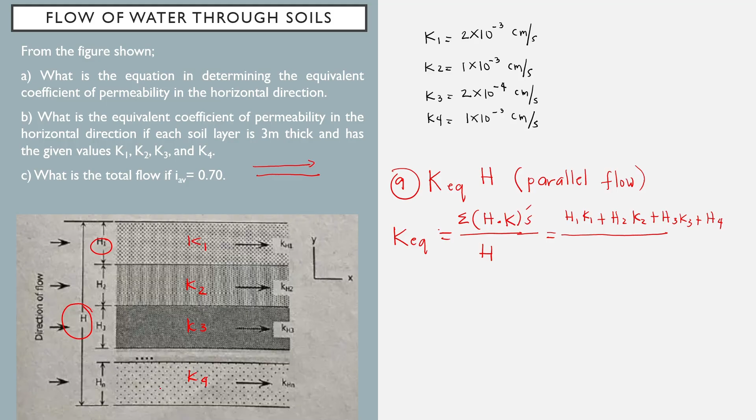So, H1, ito. Tapos, yung K1, tapos K2, K3, and K sub 4. Yan yung mga hydraulic conductivity or coefficient of permeability ng bawat soil layer natin. Plus H2 K2, plus H3 K3, plus H4, let's say 4 na lang kasi N yung nakalagay. So kung meron pang another layer dito, i-add nyo lang. K4 divided by yung total ng height ng mga soil layer natin. So ito yung letter A natin.

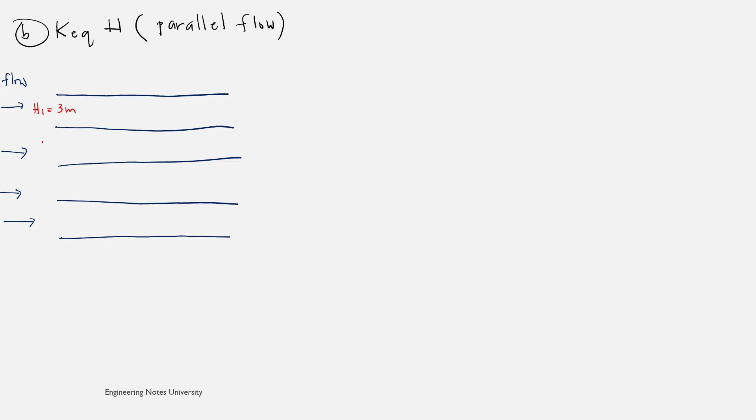H2 is equal to 3 meter. H3 is equal to 3 meter. And then, H4 is equal to 3 meter. So, kapag tinotal mo yan, yung H natin is, 4 nagdagdag 3, so that is 12 meter.

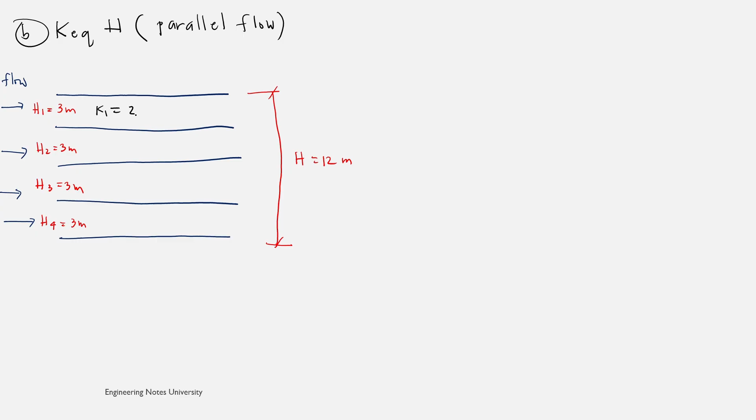So, una, pinapahanap sa atin, letter B. Lagay lang natin yung formula natin. Horizontal to. So, summation divided by H. So, spread natin. So, H1 K1 plus H2 K2 plus H3 K3, and then plus H4 K4. Divided by H.

So, ilagay natin ito. So, 3 times, plus 3 ulit, and then 1 times 10 raised to negative 5, plus... kasyahin natin. Hindi na magkakasya. Move natin dito. So, 3 times 1 times 10 raised to negative 3. And then, yung total, yan yung 12, yung total na height ng mga soil layer natin. So, that is 12 meters.

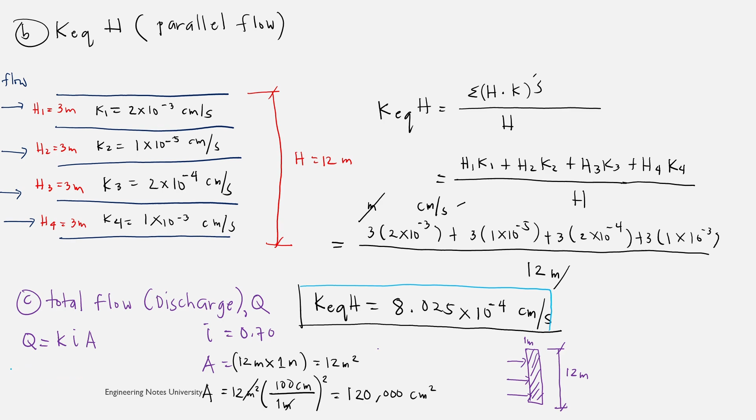8.025 times 10 raised to negative 4 centimeter per seconds. Tapos, yung I natin, ito, 0.70. And then, yung area natin is 120,000, and ang unit natin dito is centimeter squared. So, Q now. I-times natin.

So, 8.025 times 10 raised to negative 4, tapos 0.70, and then 120,000. So, magiging sagot natin dyan, 67.41, and yung unit natin is cubic centimeter per second. So, yan yung magiging discharge or total flow natin dito sa mga soil layer natin. So, letter C, Q is equal to 67.41 cubic centimeter per seconds. So, yan yung mga sagot natin for this problem.